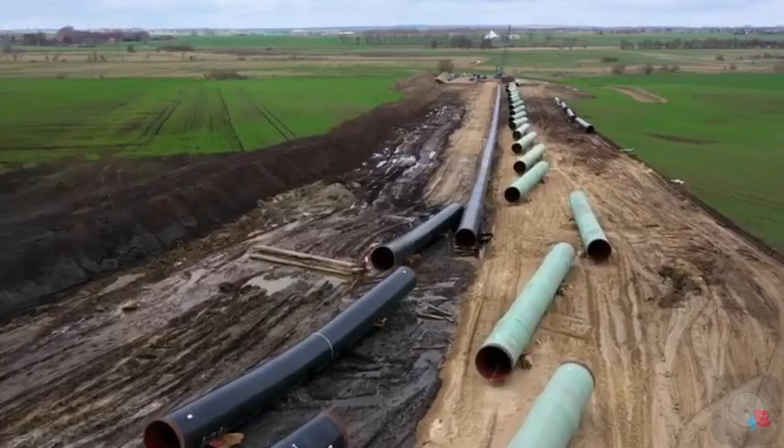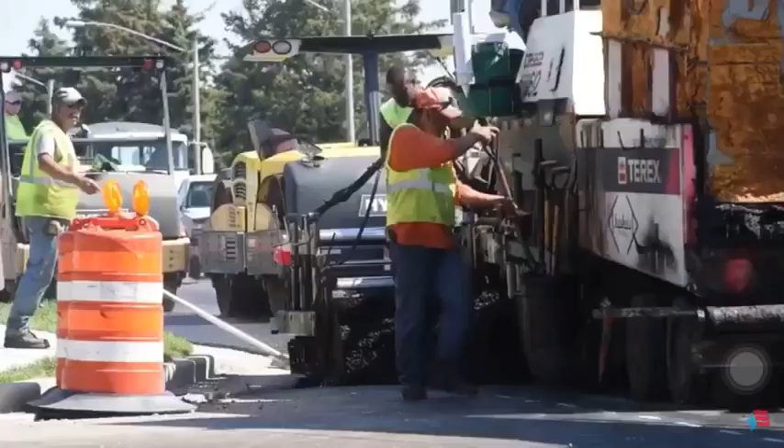Transportation engineering refers to the application of technology and scientific principles to the design, operation, planning, and management of transportation infrastructure, mobility services, traffic, and travelers for transportation systems in order to ensure safe, efficient, quick, comfortable, convenient, inexpensive, and ecologically sustainable movement of people and commodities.

A transportation system is a method of moving people or goods from one location to another. Inputs, processes, outputs, and feedback are all part of transportation systems. Inputs to a city bus system, for example, include bus drivers and fuel. Driving the bus and loading passengers are examples of processes. Arrival at scheduled stops is the output. Also included in the feedback are comments from satisfied customers.

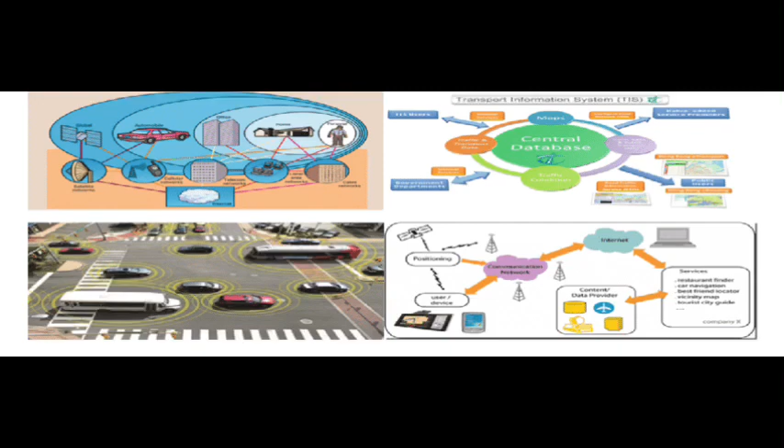Transportation systems are interconnected. Each system is dependent on the others. The transportation system changes depending on the demand, technology, operational policy, and values of the public. For the transportation system to be functional and operational, a transportation engineer is needed. So, what is a transportation engineer?

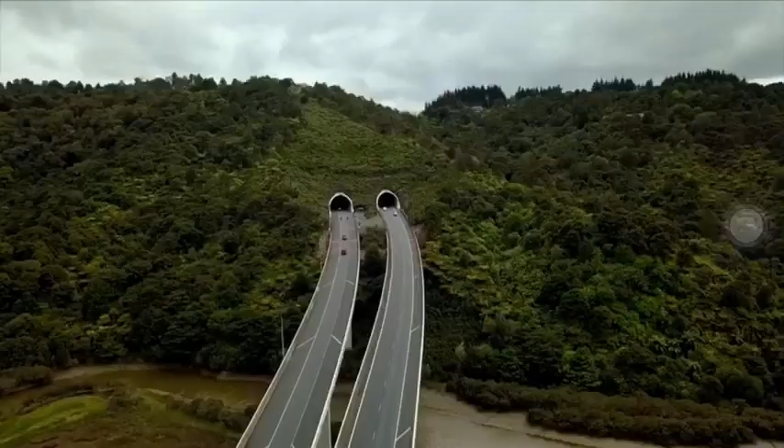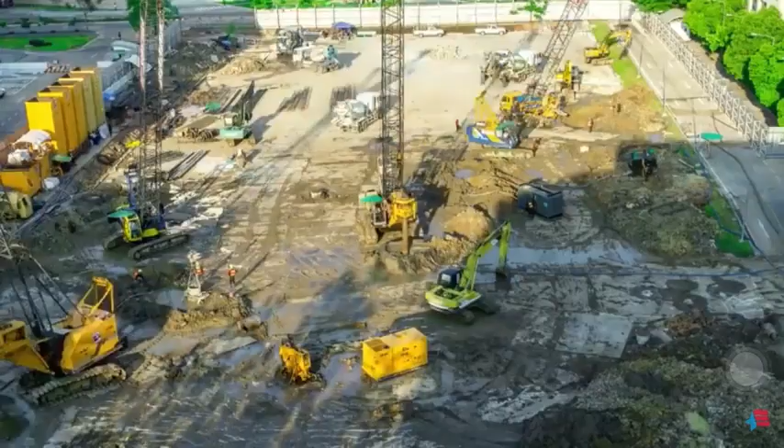Transportation engineers are civil engineers who design highways, airports, and railway and bus systems. They work for governmental agencies, for consulting firms that troubleshoot for the government, and for private firms that produce materials and equipment used in transportation.

Highway engineering is a branch of civil engineering that deals with planning, design, building, operation, and maintenance of highways, bridges, and tunnels to ensure the efficient and secure transportation of people and products.

The first mode of transportation was by foot. Human pathways were developed to lead to various places, such as campsites, food, and drinking water. Moving both men and materials using animals was the second major mode of transportation. Animal-drawn vehicles were created as the result of the creation of the wheel in Mesopotamian civilization.

Romans are the ones who constructed the earliest large-scale road, which is an extensive system of roads radiating in many directions of Rome. The Appian Way, built by them in 312 BC, extended over a length of about 580 kilometers.

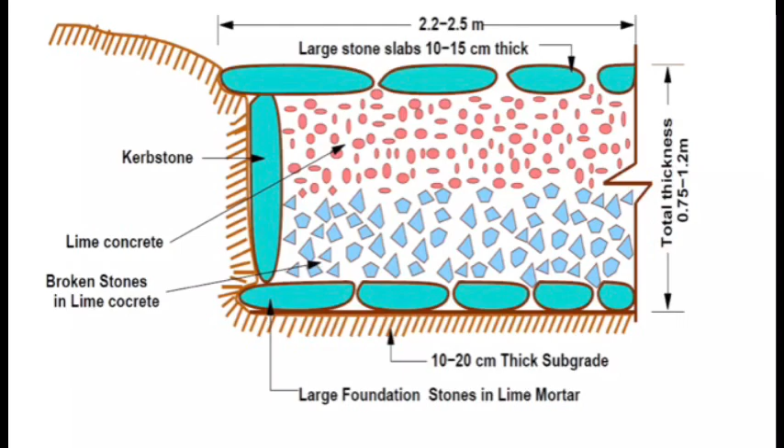During Napoleon's reign, the construction of roads underwent its next significant change. Trésaguet made important contributions in 1764. He created a less expensive construction technique as opposed to the extravagant and largely failed revival of Roman practice.

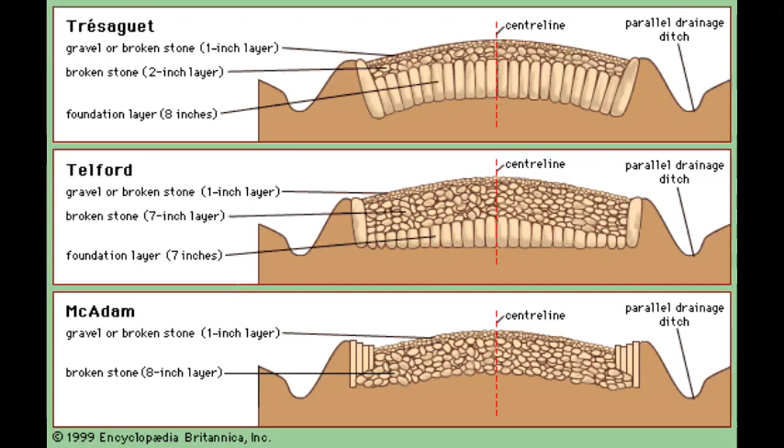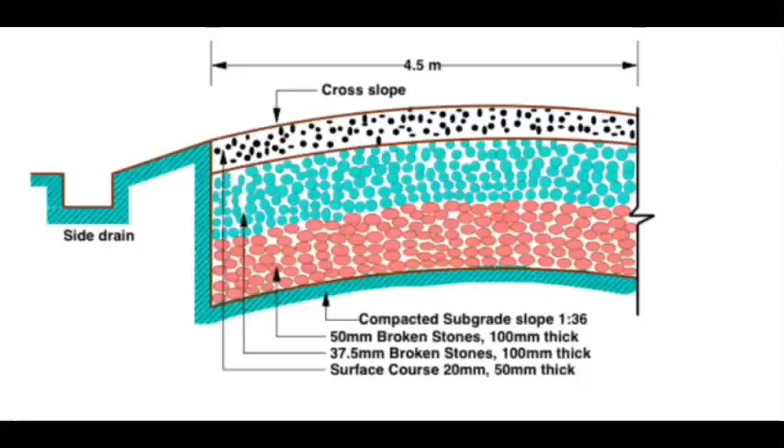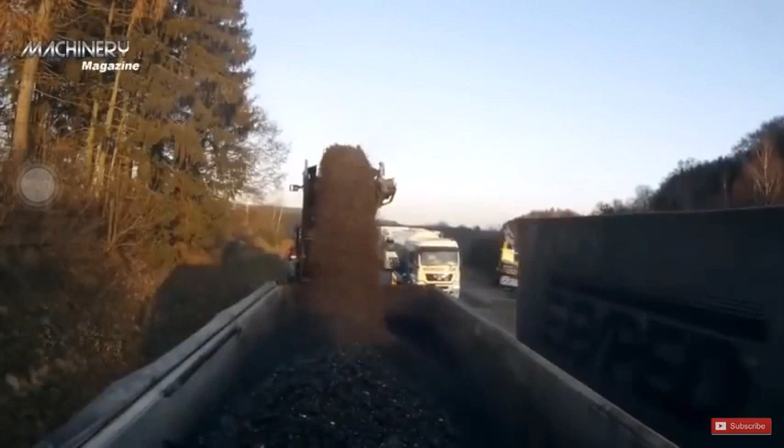The first scientific road construction technique was introduced by the British engineer John McAdam, where the size of the stone was a very important element of a road. The typical cross-section of British roads is like this. The modern roads followed McAdam's construction method, but they used concrete and cement. There are also several advanced and affordable construction technologies used.

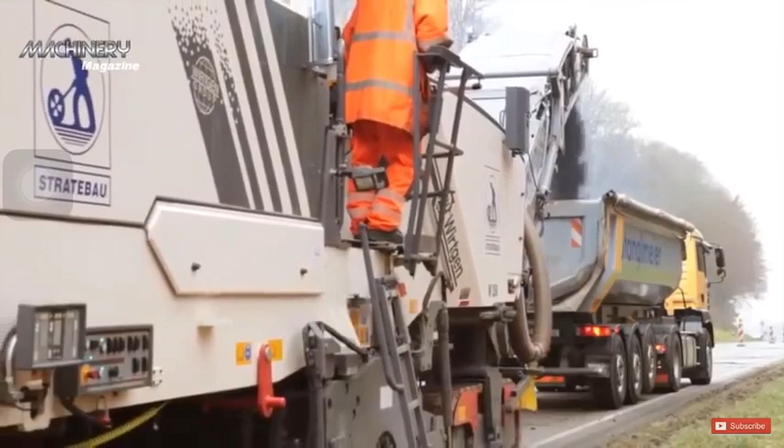The roles of transportation in society can be divided into those related to the economy, society, politics, and the environment. Even if it only makes up a small portion of input expenses, the fact that transportation is a factor in the economic production of goods and services implies that it is essential to their development. This suggests that an activity cannot take place without the factor of transportation and the mobility it gives, regardless of cost. Hence, very slight changes in transportation costs, performance, and capacity can have a big influence on related economic activity.

Access to services and activities including school, employment, shopping, and social gatherings is made possible through transportation. The quality of the available transportation options has an impact on people's capacity to engage in social and economic activities.

The political domains of different countries are divided into different political entities which are set up for mutual protection, economic gain, and the advancement of a shared culture. Transportation is essential to how these political organizations operate and carry out their functions. Transportation systems contribute to both deteriorating air quality and the changing climate through emissions from burning fossil fuels. Transportation has negative effects on the environment.

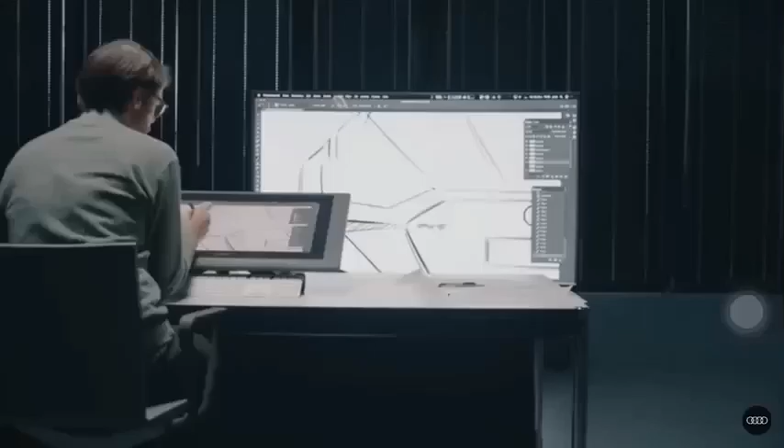The vehicle designs, vehicle dimensions, weight, axle configuration, turning radius, turning paths, and visibility can affect transportation in either positive or negative ways. These elements have a significant impact on both the geometric design and the design of control facilities. For the smooth, safe, and effective flow of traffic on the road, it is important to consider the various driver, vehicle, and highway factors.